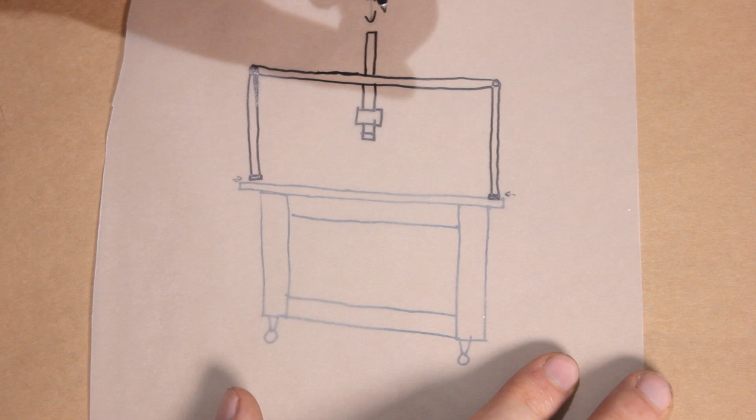I'm thinking of having a structure to place my camera on that allows me to move the camera for adjusting shots. It has to be simple to make and portable for easy storage.

For this, I thought we could use PVC pipes. It's an easy to work with material, relatively sturdy, and there are many sizes and adapters available in the market.

Okay, so we have an idea of what we are looking for. Let's make a quick sketch.

If we do a mental exercise, some parts need to be removed to fulfill these functions, like this top and bottom bar. The bottom one will interfere with our hands when working with large items on the table. So we'll eliminate the bottom part and make them movable to adjust the height and maintain some stability.

With this in mind, let's go to the hardware store and see what components we can use. There, I saw different types of tubes with different diameters.

I'm not sure which one we'll use or how much I need, so I'll have to use generic dimensions for this project. There are also these tube connectors, 45 and 90 degree ones, but I don't see any three-way connectors.

I was hoping to find ones like those used for building kids' playhouses. Searching online, I found on Amazon they sell a variety of models. In my local hardware store, they focus on construction materials, so having those shapes doesn't make sense.

The simplest way will be to buy those connectors and design based on them. Since I want this to be a quick project, I won't buy them. Instead, I'll design connectors and 3D print them.

In the store, I also found LED bars that could serve to illuminate while recording on the table.

I'll use a parametric design software, allowing me to design variables for later modification. This is because I don't know the exact diameter of the pipe I'll use at the end, so I'll define a generic size now, and then when buying the tubes, I'll do the fine-tuning.

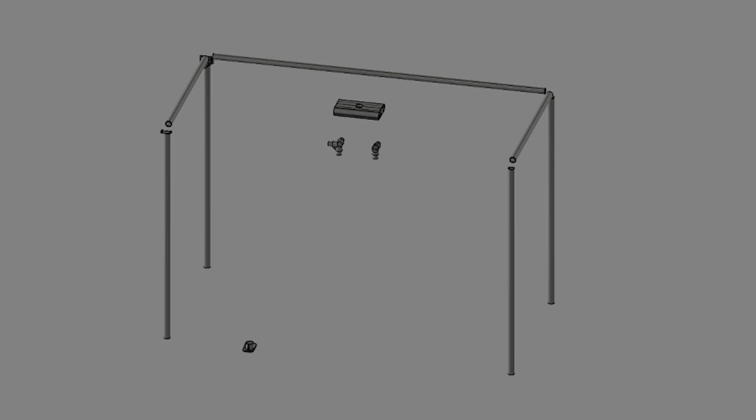After a few hours of designing, I achieved this result. It has a couple of mechanisms that are explained during assembly.

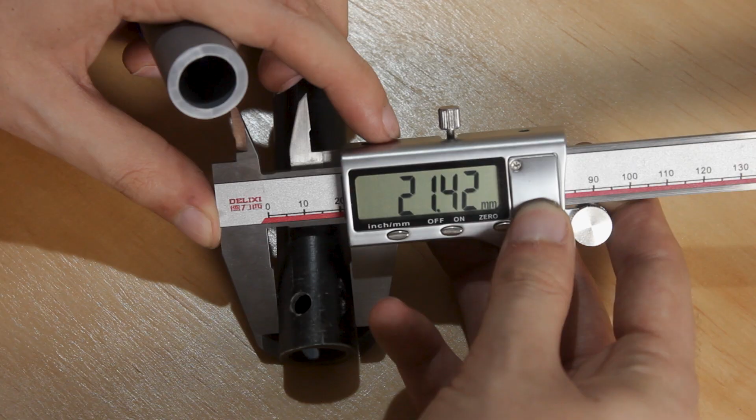About which tube we'll use, I checked the store websites for some types, but I didn't find much information. I have lying around two types of tubes here with almost the same diameter, but with small variations.

Later, I found a technical datasheet from the manufacturer online, so it seems like the cold water threaded tube has a thinner wall and it's cheaper than the hot water one. I'll adjust those values in the 3D design, although we'll still have to measure the actual tube for the final adjustment.

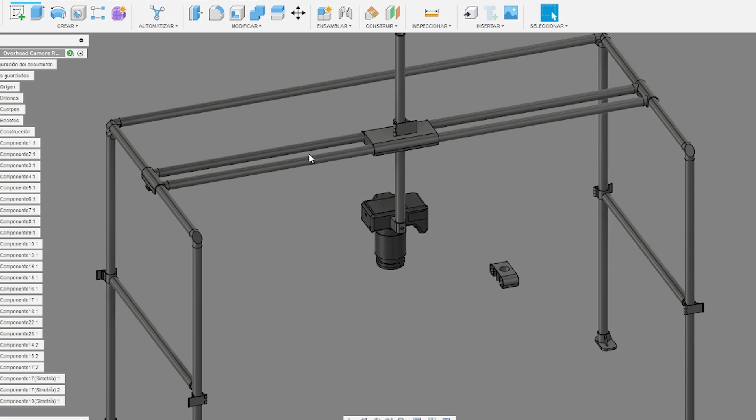Now, knowing the dimensions we want, we can buy the materials. We have the tubes, PVC glue, and spray paint. I also bought this PVC pipe cutter for around $6. You can cut with a saw, but this makes our job much easier. I printed this test version to analyze the fit of the parts. So far it looks good, so we can move on to print everything.

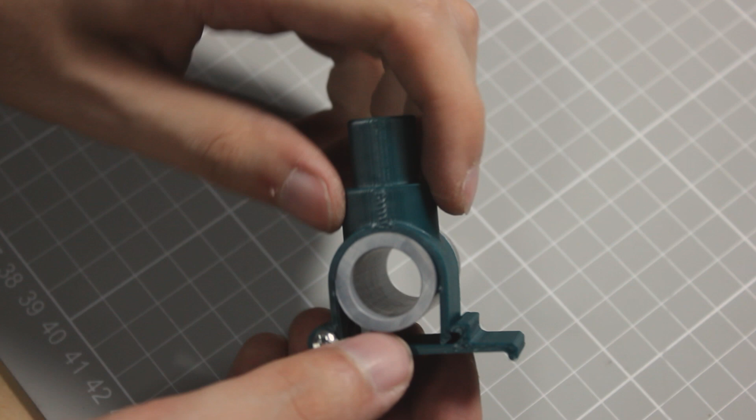Before gluing the pieces, we'll do a test of how everything fits. We have to be careful because the joints may come apart. The assembly was as expected, but when installing the camera, this happened.

Alright guys, I was testing the fit of the prints and they went really good, the fit with the pipes and the prints, but when mounting the camera I got this.

Well, I'm a little bit short on time for this project, but as you can see, it's not working properly, so I'll need to redesign the system to make it work properly.

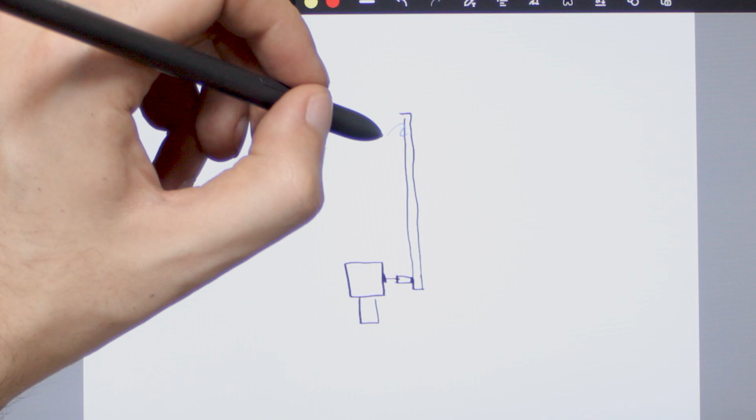Let's analyze what went wrong. Due to its weight, the whole system tilts forward. As I mentioned in the beginning, PVC is a relatively lightweight material for its strength, but it still bends easily. Assuming the camera's weight is roughly in the center, we can extend that force line to the holder. In this case, we'll see that gravity moves the holder downward.

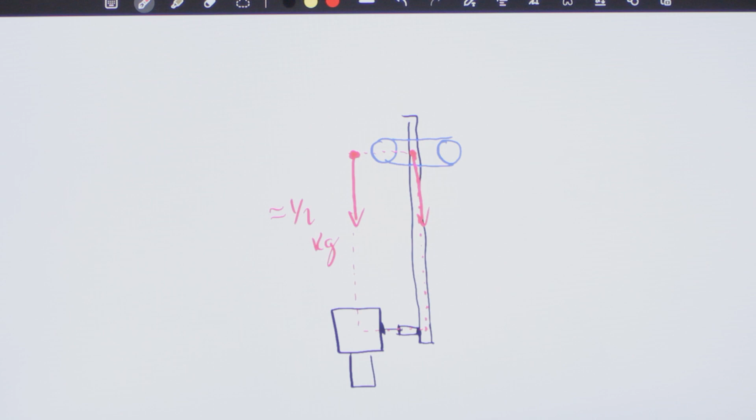But there's also another component of the weight that generates a moment, and as the system is supported with PVC tube with a certain flexibility, it causes everything to rotate.

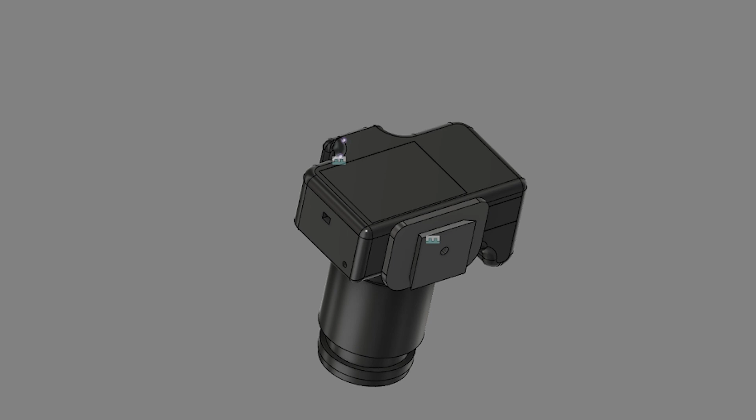At this point, the complete solution took a bit longer than planned, and maybe buying it directly could have been an option. After finishing the project, I hope it's still worth it to do it DIY.

This new design is based on minimizing this torque as much as possible. The original plan was to use a ball head and an arm to move the camera at angles. This will inevitably generate that torque, so we'll have to compromise on functionality.

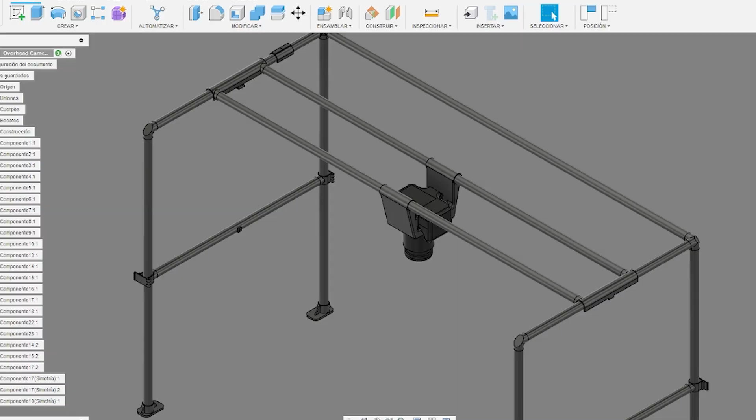However, I did like having the flexibility to record at angles. But for that, I'll use the same tripod shoe. This way, I can install it on both the rig and the tripod without having to unscrew it. With this in mind, this is the new design. Let's print it and test it.

So far so good. Now we can glue with PVC adhesive, clean the structure well, sand it lightly, and paint it for a professional look.

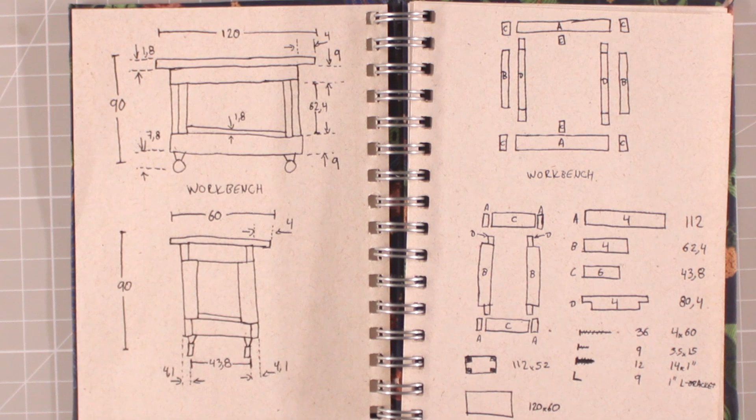This project was quite interesting. The price of the components for the structure cost me around $24, and the cutting tool for the PVC pipes was around $6. So for $30 in total, I think it fulfilled the purpose.

However, if I had to do this project again from scratch, I will use larger pipes for more stability. For now, I let the setup as is because it works for the next episodes of the series. But this stands as a reminder that we should plan our projects carefully and anticipate as many errors as possible.